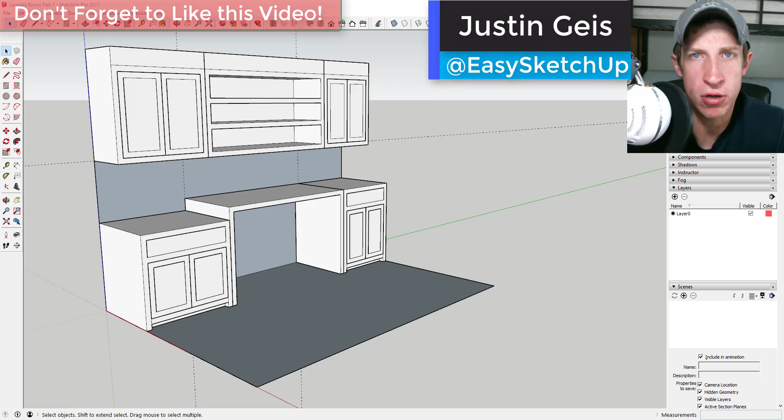So in the last video we started modeling a laundry room based on an image, and now we're going to go through and keep working on that, finishing our room out and starting to add appliances and that sort of thing.

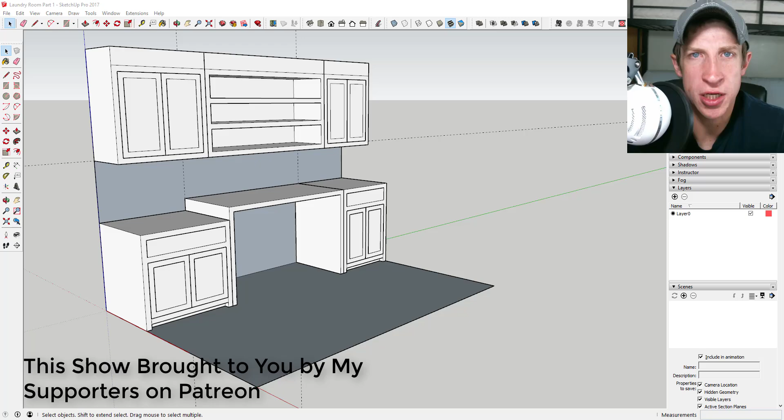Now let's go ahead and jump into it. So yesterday we focused on coming in here and working on our cabinets and our shelving and that kind of thing. Now we're going to continue that. We're going to add counters, work on this crown molding up above, and probably work on the window and some other things as well.

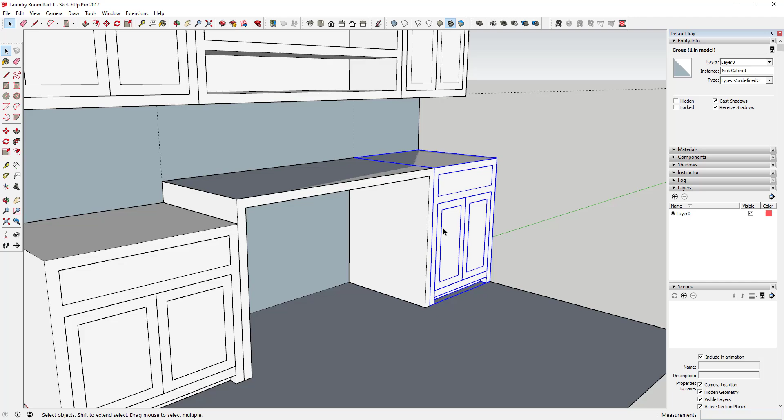The first thing I'm going to do is add my counters. To add my counters, I'm just going to draw a rectangle across the top of these objects. You can see when I click on these objects, they're in groups, so that geometry is not going to merge. Then I can come in here and pull this up, and in this case we'll give it a thickness of 1 inch.

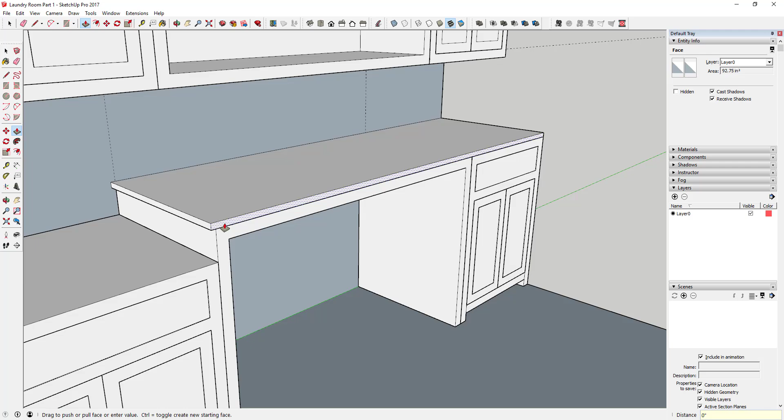It may not quite be 1 inch, or it may be a little bit more. But the other thing we're going to do is pull this just a little bit so that we've got a little bit of an overhang. We'll give it 3/4 of an inch here, and we'll double click on this front face, and that'll pull that out 3/4 of an inch as well.

Then we'll do the same thing we've done before, where we select this object and put it in a group. I'm going to go ahead and name that large counter in the outliner.

Then we're going to do the same thing over here, where we model it, and we'll have to adjust this one because that's where our sink's going to go. But for right now we're just going to model it in here and get it in a group, and we'll mess with it more a little bit later. We'll go ahead and call this small counter.

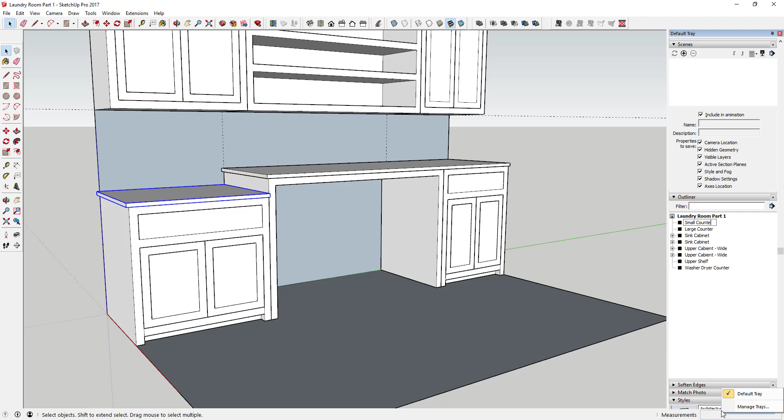What we're going to do is bring in a sink model, probably from the 3D warehouse. We may end up modeling it ourselves. We'll see, we'll do that in a little bit.

So the next thing I'm going to do is actually model out the wall over here on this side, because our image has a wall over here with a window in it, and I want to make sure we capture that window and that sort of thing.

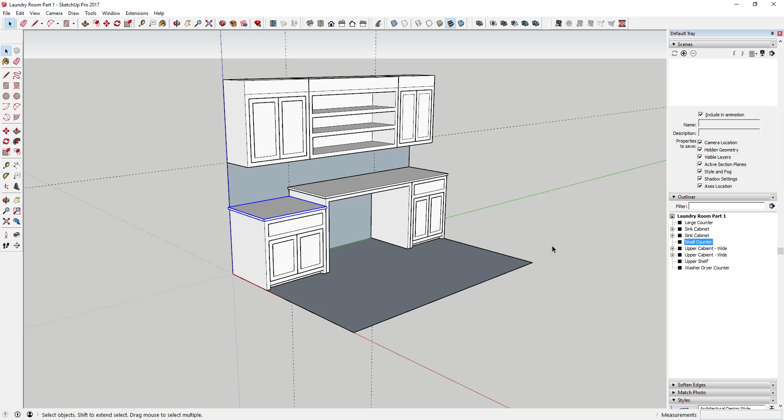So I'm going to start off and just draw a rectangle to kind of get this back wall figured out a little bit. Then we're just going to use dimensions, or the tape measure tool, to figure out where we want this to be. I'm probably figuring there's going to be about 3 feet from this corner to the window over here.

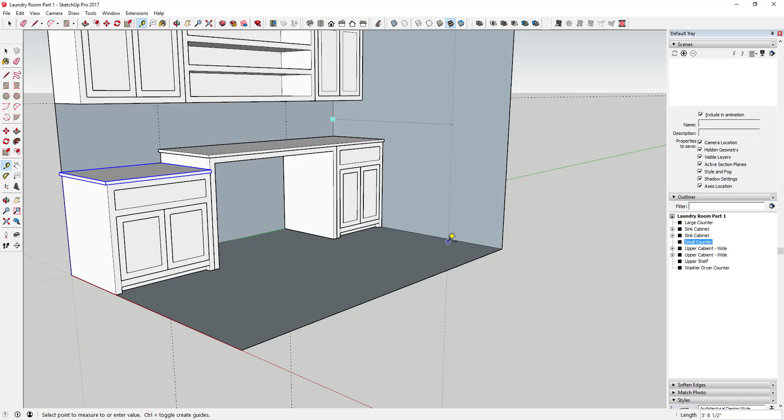So we'll go ahead and just create a guide using the tape measure tool to this point. Now I have a point where I know I want my window to start. From there, we can start using guides to rough out our window shape, and then draw in the rest of our wall.

For example, I'm going to figure it's probably about 1 foot 6 inches off the ground, and I'm going to figure it's probably a 6 foot high window, probably a nice big open window. So then from there I'm just going to draw another

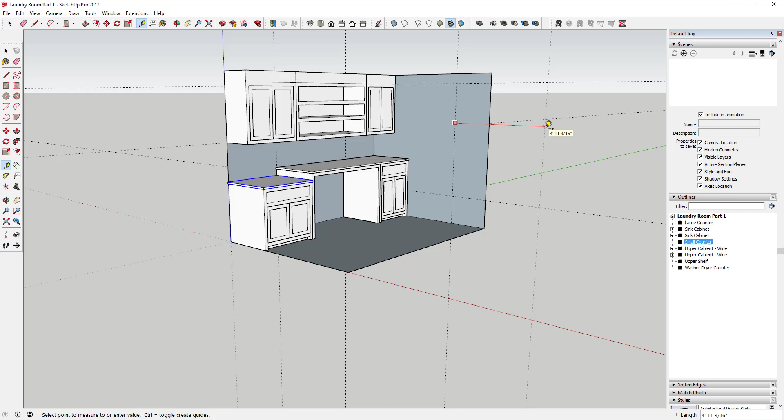dimension, or another guide using the tape measure tool, and I'm going to figure this is probably a 4 foot wide window. Based on that, I can come in here and extend this wall out a little bit, draw this wall in, and then erase this out, and this gives me roughly what my window size is going to be.

I'm actually assuming that the window is going to be a little bit smaller because it's got some trim around it, but this is basically the dimensions that I was seeing here. So we're just going to take this piece right here, and we're going to pull it in so that we have kind of our wood trim around the window.

In our image, the wood trim is pretty deep. So the other thing I'm going to do is I'm actually going to move this bottom piece down, because I'm going to assume my sill height is probably at about 1 foot 6 inches high, and then we're going to extend our trim down a little bit more.

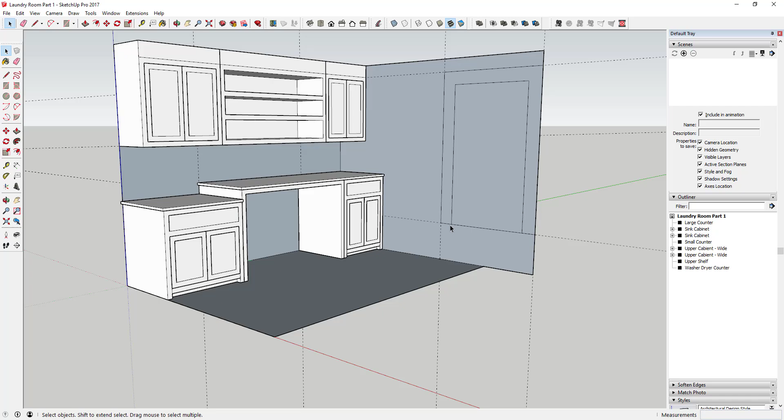So I'm just going to kind of extend this down by manually drawing it in, at least for the moment. So I've got generally my window kind of roughed out, and now I'm just going to give it a little bit of depth.

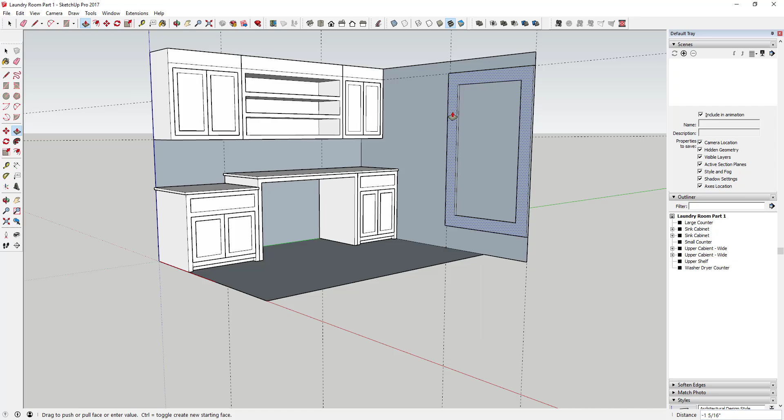So I'm going to push pull it out, in this case we'll just call it an inch for right now. I'm going to go ahead and select this whole thing, and reverse the faces so the proper side is facing out, and then we can start detailing out our window itself.

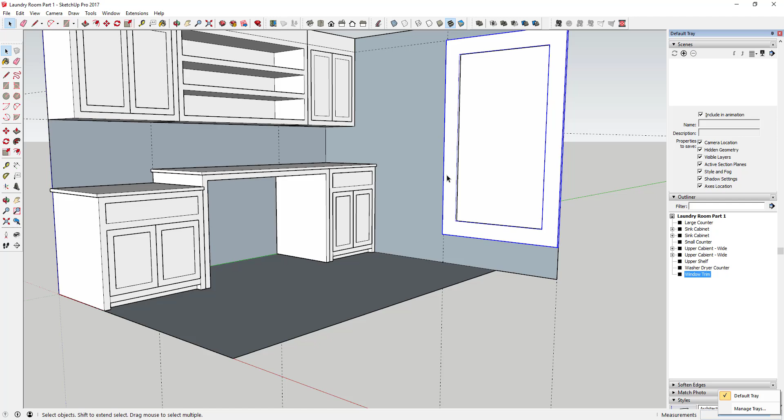The first thing I'm going to do is put all of this in a group, and then unselect the middle piece. I'm going to select basically the trim, right click on that, put it in a group, and name that window trim. The reason I'm doing that is so I can get in here and work on this face without that getting in the way.

So all we're going to do is come in here and find the midpoint along this line, finding that inference point, and then we're just going to model our glass in and that sort of thing.

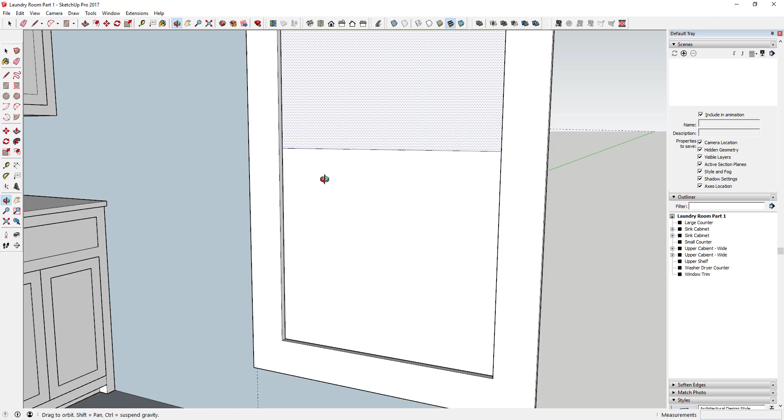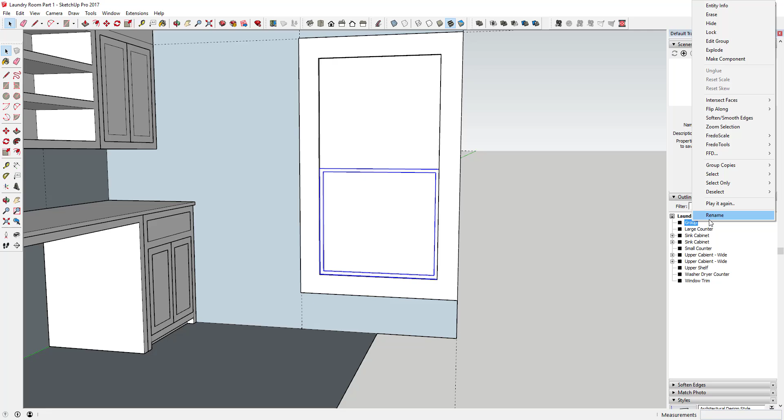It's looking like there's probably going to be about a 1 inch offset here. So we're going to offset this by about an inch, and then push pull this back a little bit, probably about an inch back, so that it looks like an actual pane of glass. We'll go ahead and select that, and make that our bottom pane. Then we'll come up here and do something similar on the top.

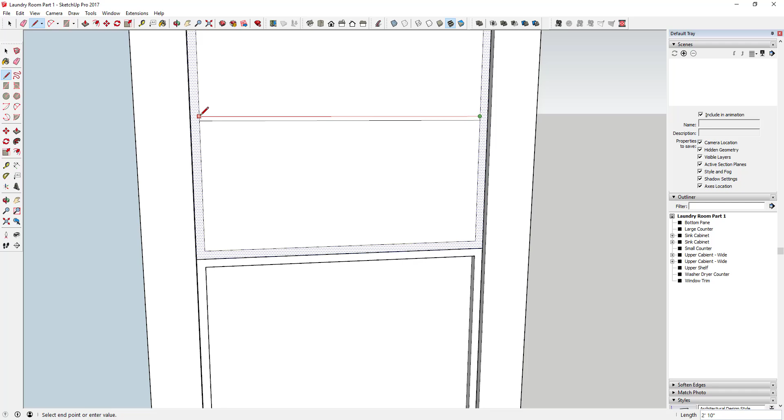Only on the top, before we do that, we're going to detail out some smaller panes in here. So we're going to figure a 1/2 inch here and a 1/2 inch here, and then we'll draw a line across.

We can erase out this middle piece. This looks like it's divided into 3 panes, so we're just going to right click on this line and click divide, and divide that into 3 segments. Once we divide that into 3 segments, we can just do the same kind of thing.

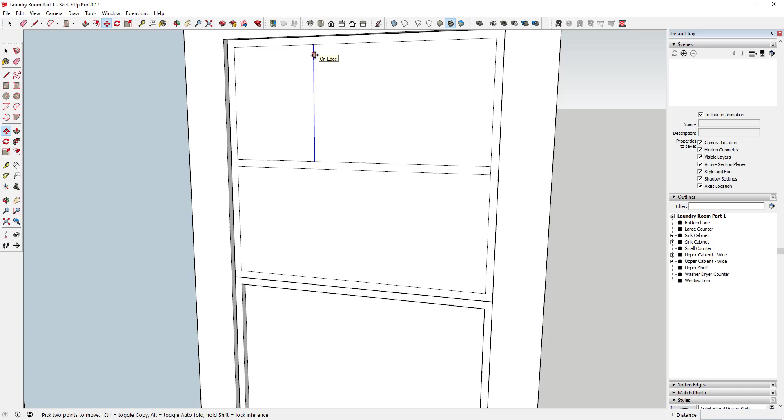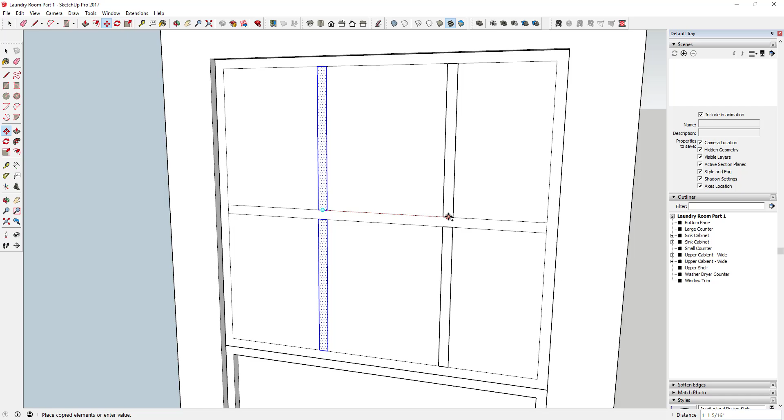I'm just going to use the move tool in copy mode to move these over really quickly and easily. Then you can double click on this to select it and use the move tool in copy mode again. Then you can double click on both of these and do a shift click, and just move them across to wherever that point was where we divided this into 3 pieces. Then you can come in here and erase out this extra stuff.

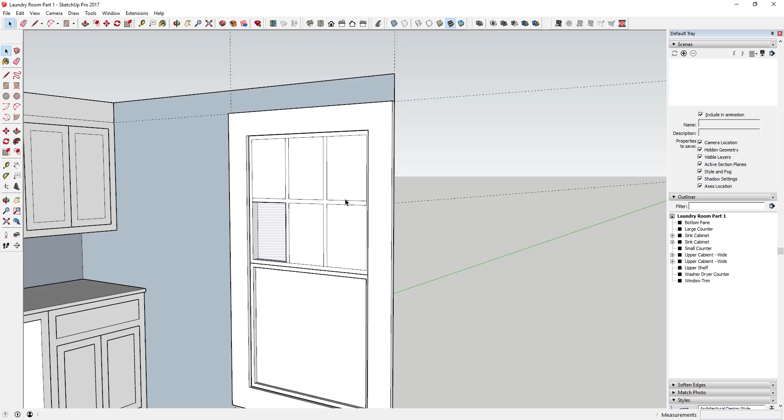And then we'll just push pull our glass back, and remember, we're going to use the memory function of the push pull tool. So I push pulled this back, and now I can activate the push pull tool and just double click on each one of these, and you can see how it's going to push pull them back all to the same depth, so all to that 1 inch.

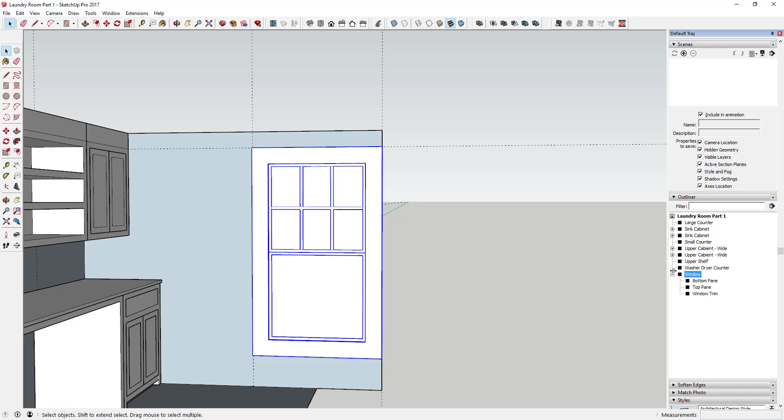So we can select this, right click on it, make that a group, and we'll call this top pane. Then I'm going to do a control click over here in my outliner. I'm going to select my bottom pane, my top pane, and my window trim, and put those in a group, and we'll just call this window. So now we can get in here and find that really easily.

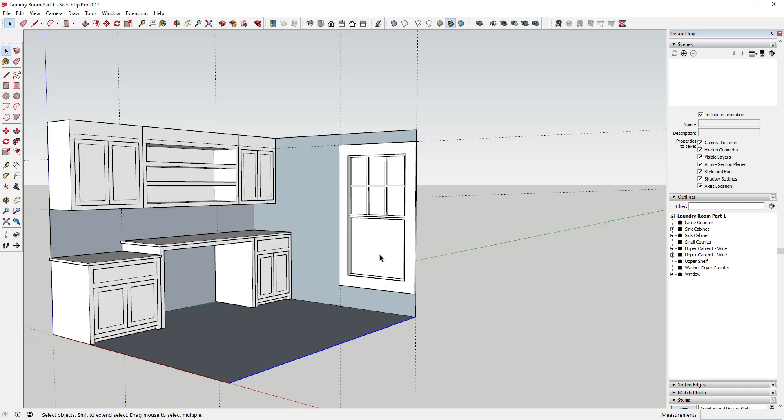And probably depending on the way that we decide to render this space, or the way that we decide to show this space, we may need to detail out more of this wall or make this floor a little bit longer. We can mess with that in a bit. So now we've got our window kind of detailed out, and we'll come back and add materials in a little bit.

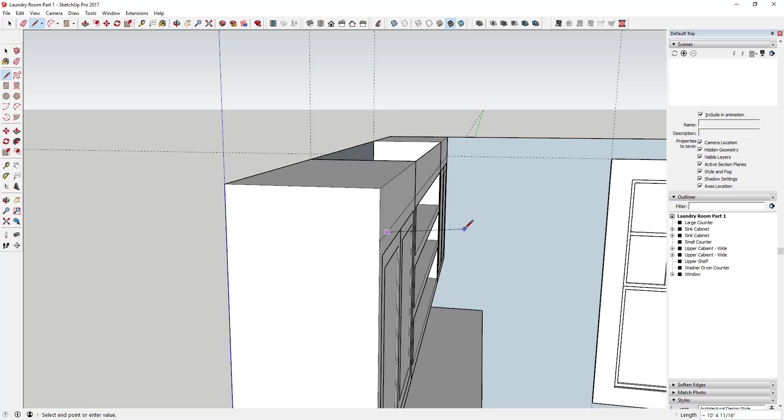What I want to do now is model out the crown molding along this face. So in order to do that, I'm going to draw the profile of the crown molding somewhere along this edge. It doesn't really matter where. So all I'm going to do is draw a little box, just kind of a face in here, and then I can come in here and model out the profile of what I want that crown molding to look like.

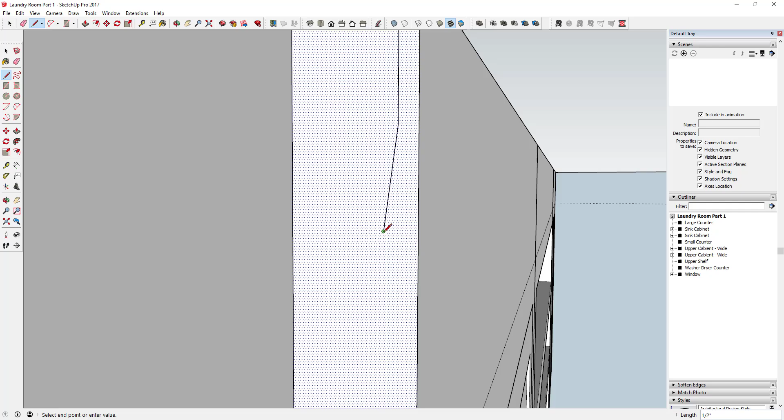In this case, I'm just going to make it very simple, and we'll see how this comes out. We may have to adjust this, but I'm just going to draw a profile along here, and then we're going to extrude it along this face. So I'm doing an initial push-pull on this to see how it looks. For now, I'm okay with the way that this looks.

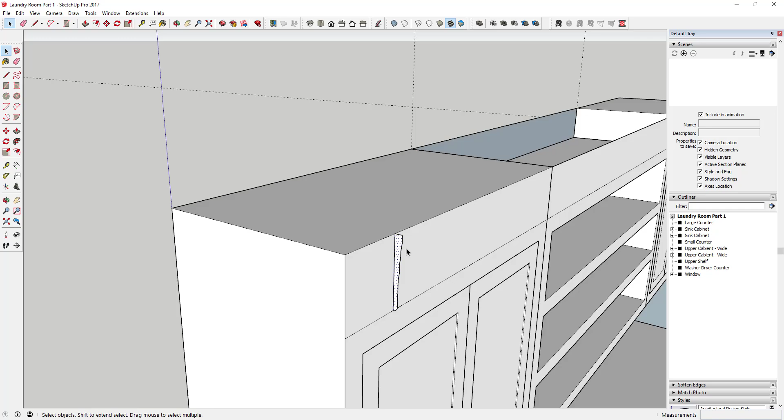So what I'm going to do is actually draw a path. I'm going to draw a line all the way along the faces that I want to extrude this crown molding along, all the way across here. And then I may have to do this twice.

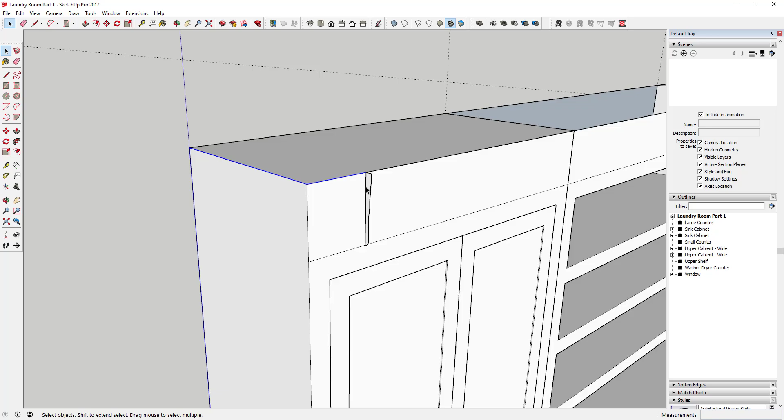For now what we'll do is select this path by doing a shift click, and we're going to activate the follow me tool. Then we're going to click on this face, and you can see how when I click on this face, it extrudes that profile along this path. Then I'm going to come in here and reverse these faces.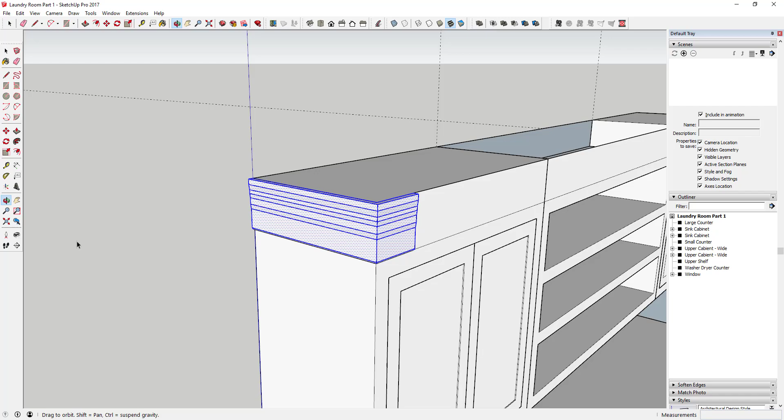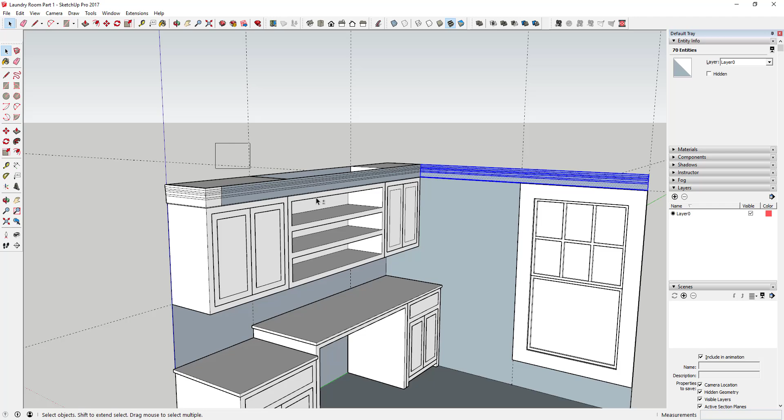But I'm going to do the same thing over here. I'm going to do a shift click and select these two lines to create my path. Then I'm just going to activate the follow me tool and click on this face, and you can see how it extruded that all the way along this path. So now I've got this big old piece of crown molding in here.

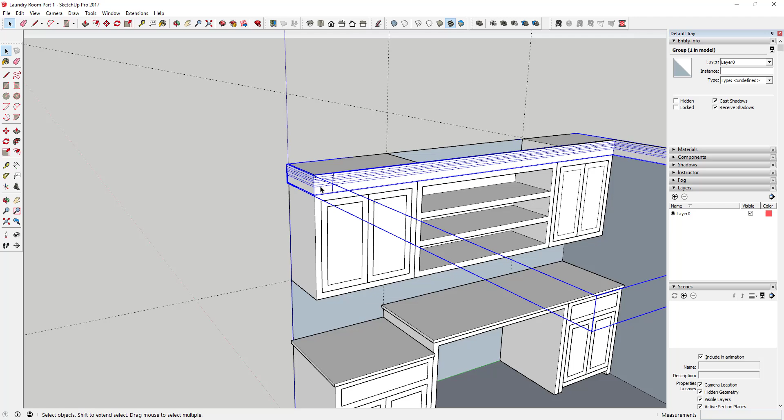So I've got my crown molding in here, and you can erase out the extra lines along here. Before I do that, I'm going to put all my crown molding in a group. I'm going to right click on that and click make group. Actually, what I'm going to do real quick, because I think I picked up a little extra geometry in here, is move this up, double click inside the group, and erase out whatever extra stuff I had in here, because I don't really want this extra geometry.

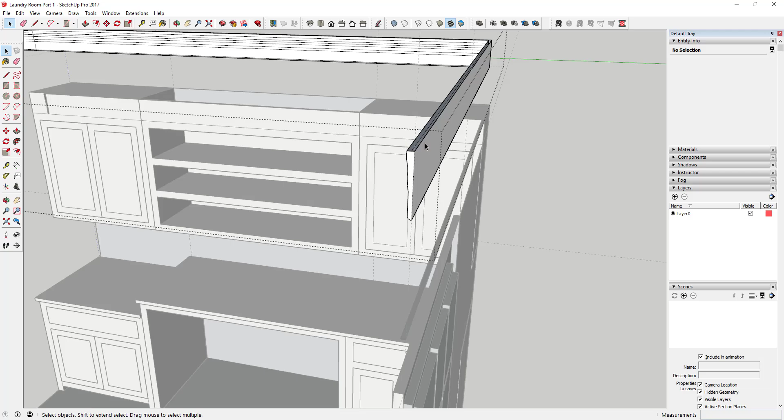And I'm also going to fill this back piece in, because it looks like for some reason that didn't get filled in when I extruded this. And I'm going to erase out this extra geometry over here. So I'm just kind of doing a cleanup, basically, so this looks like a big uninterrupted piece.

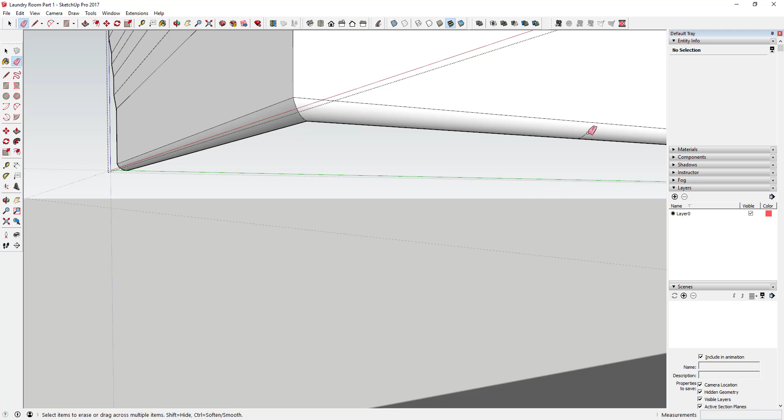And you can see how some of this got left over in here. You can kind of erase all that out as well. I like to keep my models kind of cleaned up when I'm doing stuff like this, but again, that's a personal preference thing, because it's going to be behind this crown molding piece anyway.

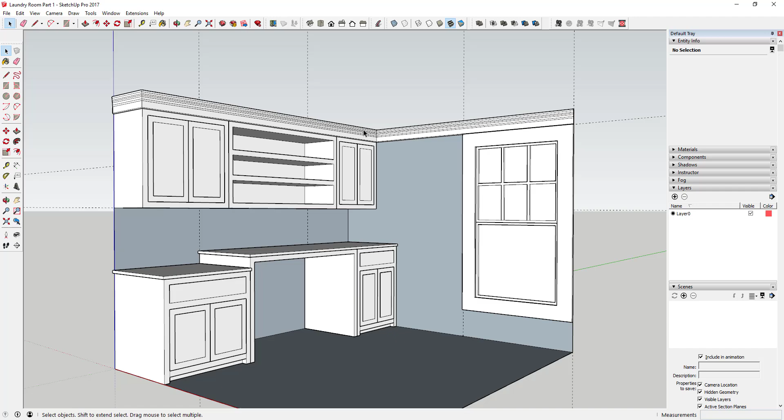So now I've got my crown molding modeled in here. So I think we may be good to come in here and start adding materials and accessories.

So the first thing I'm going to do is go up to my 3D Warehouse and see what I can find for cabinet hardware. So I'm just going to search for cabinet pull.

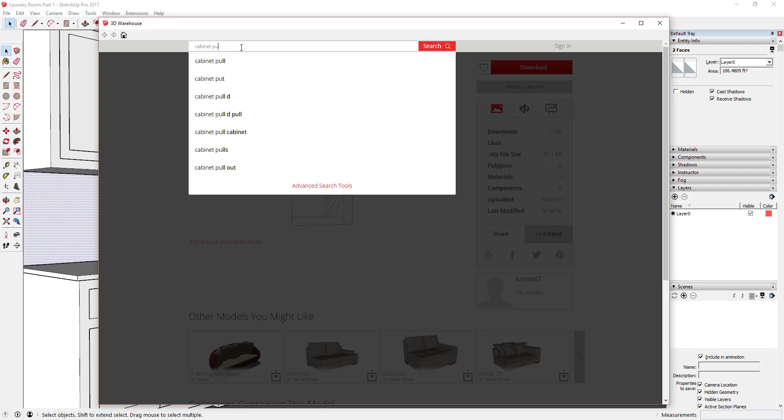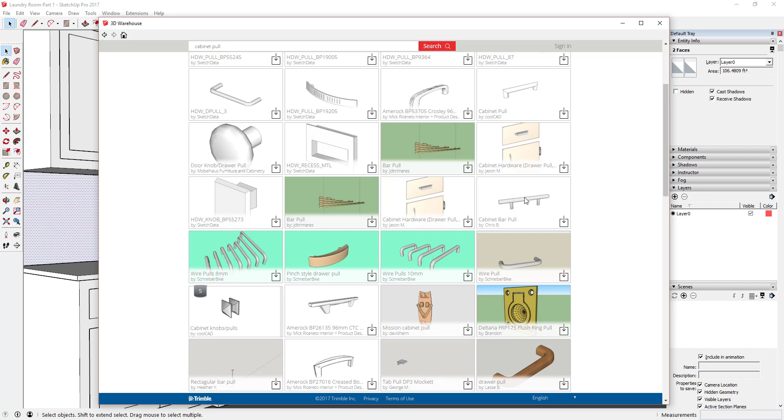You can see how there's a whole bunch of different stuff in here added by a whole bunch of different people. Some people just come in and model these because they like modeling them, and then sometimes you get these from manufacturers. They'll actually model out their own stuff so that you can find it and use it in your models.

In this case, I'm just going to find this cabinet bar pull, click download, and drop that right into my model.

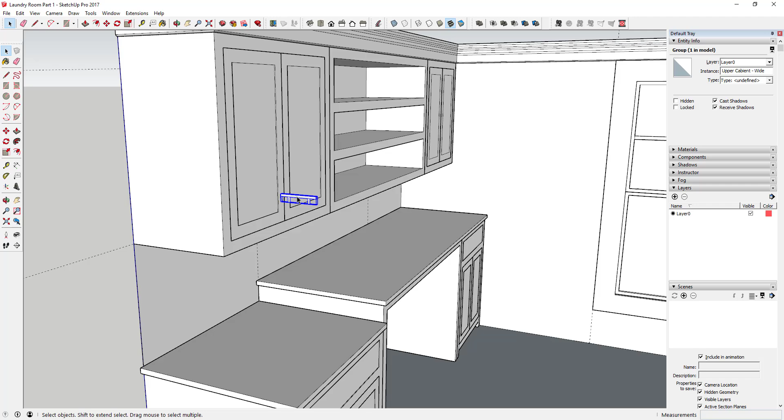What I'm going to do is start adding that into these cabinet components. I'm going to use this piece as a base, and then make copies of it, using the move tool in copy mode to create a copy. Right now that's not in this cabinet group.

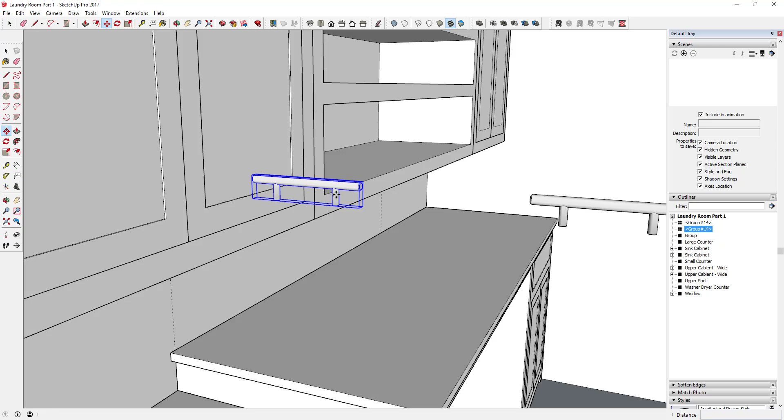What I'm going to do is go ahead and place it. I'm just going to use the move tool, and use these little red crosses to rotate this, then move it into place on my cabinet, using a little bit of inferencing to do that.

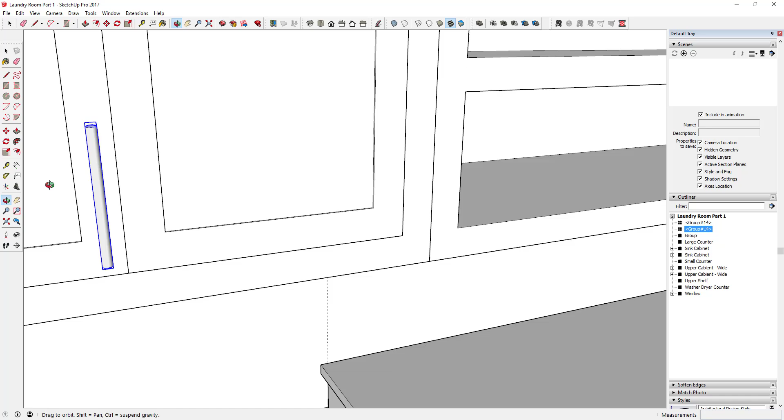And that looks pretty centered for right now. If I was really worried about it, I'd probably draw a line across to find the exact midpoint, but for what I'm doing right now, I think this is going to be close enough.

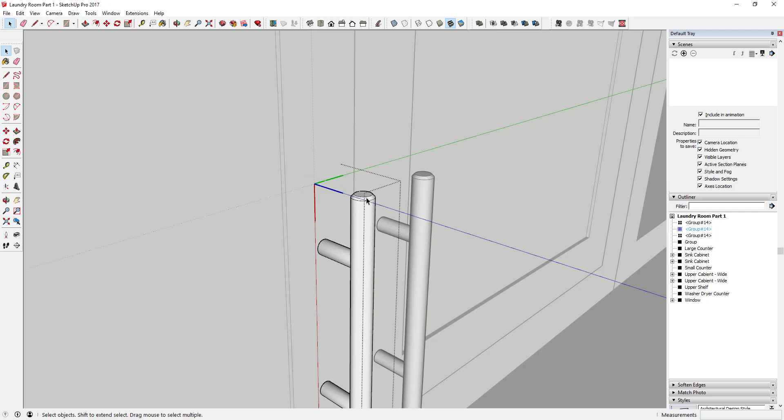You can see how as I brought those in, they're getting brought in as group 14. The reason is because they're all copies of this group 14 component, which means if I come in here and adjust one of these, the other one would adjust as well.

I think I'm okay with that for right now. We may have to come back and make them unique later. But what I'm going to do is just take those two objects and select them.

Then I'm going to find this group for this upper cabinet on the left, and drag them into that group. So now you can see how when I click on this, these are actually inside that group in that cabinet. I just use the outliner to group things appropriately.

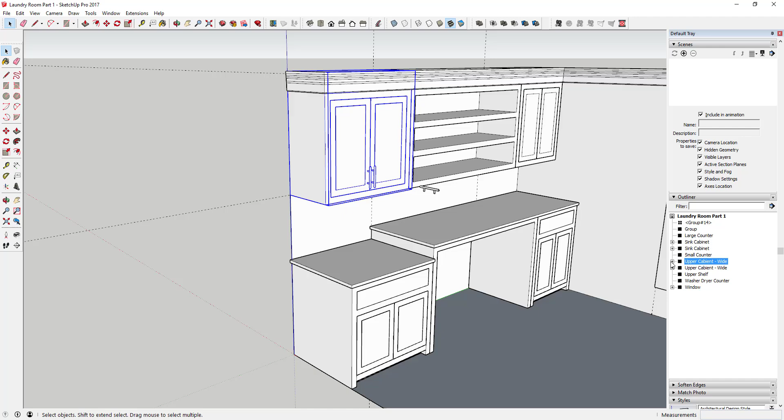If you wanted to, you could come in and rename these cabinet pulls or something like that, to keep this organized even more. It's probably not that big of a deal for right now. So I'm just going to do the same thing for the rest of these cabinets, and then I'll get back to you.

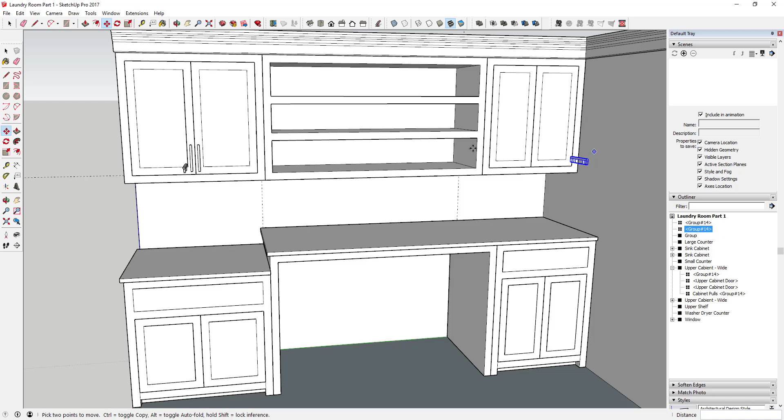Alright, so now all that hardware is in a group, so I can come in here and delete out this extra piece. Now I've got hardware in all my cabinets, and they're inside the groups and everything else. Now we can start looking for washers, dryers, and hardware and that sort of thing.

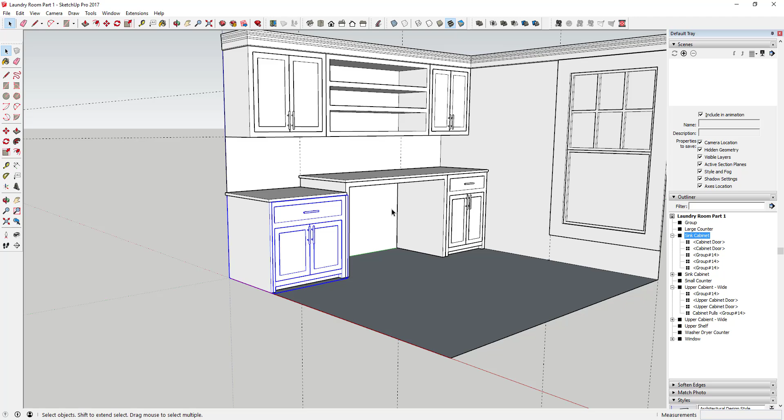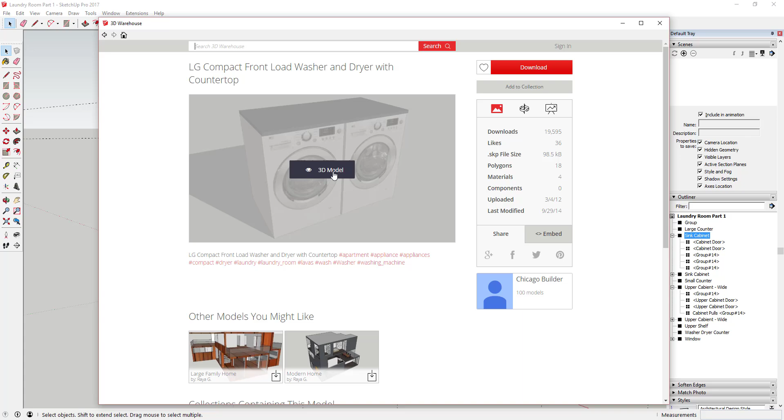Depending on the way that you want this to look, when you're picking out a washer-dryer model, you can see how this washer-dryer is actually just an image placed on a flat face. You can bring that in if you want to, or you can go find a washer-dryer combination that has more of the geometry actually modeled. You can also look for something that's the color you want, or come back in and adjust the color later.

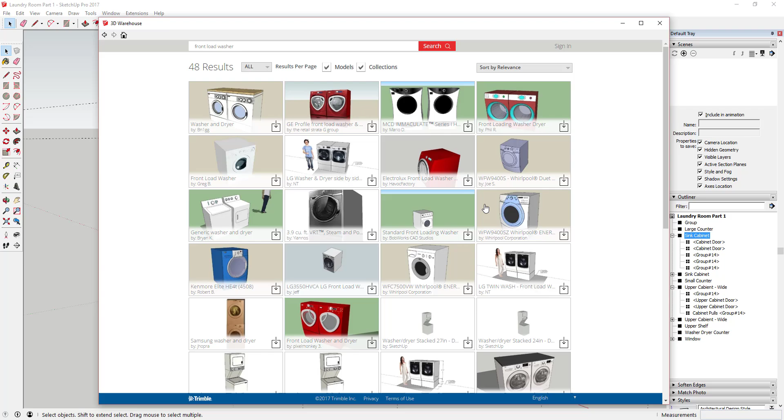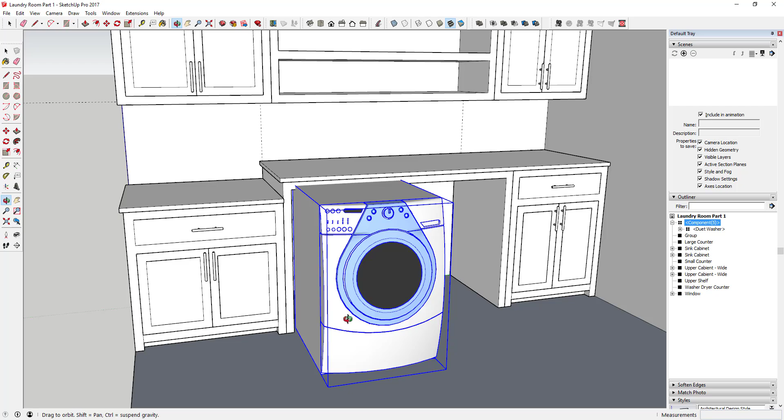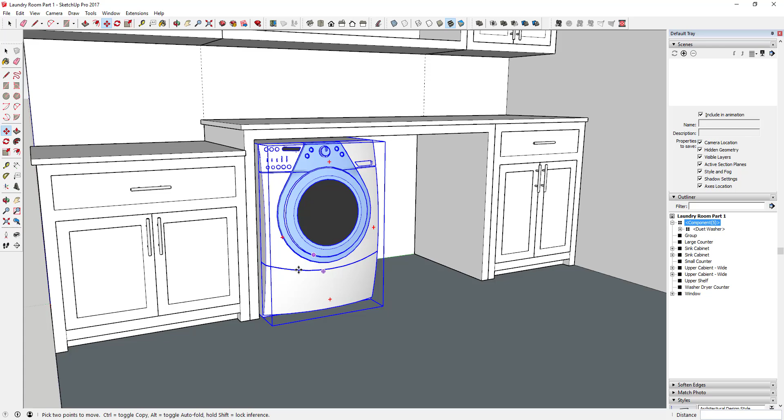So I'm going to bring this in, and as you can see, that comes in backwards. All you have to do is flip that using the scale tool. One useful thing here is scale - this probably means my counter is a little bit too short for this particular model. So I'm going to scale it down a little bit and move it back into place. You could also use these models, especially if they come from the manufacturer, to figure out if things are actually going to fit or not.

These are pretty similar looking, so I'm just going to make a copy of that one for right now. We're going to come back in probably in the next video and color these up so that they look a little bit more realistic.

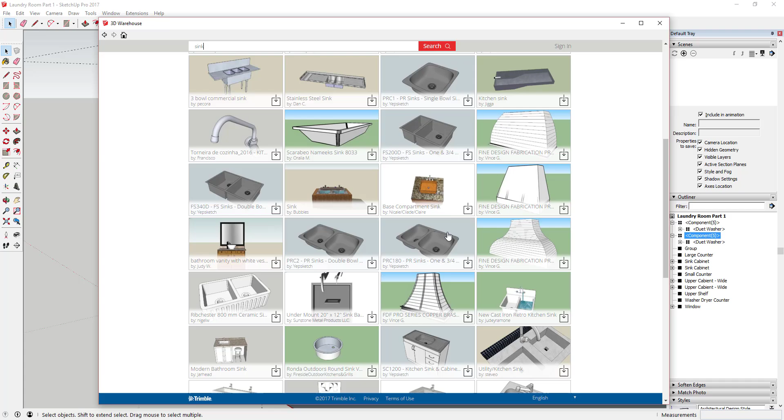Usually you can come in here and just do a search for a sink and kind of find the sink that you want. So you could look for single sink, or you could probably look for something like single kitchen sink as well.

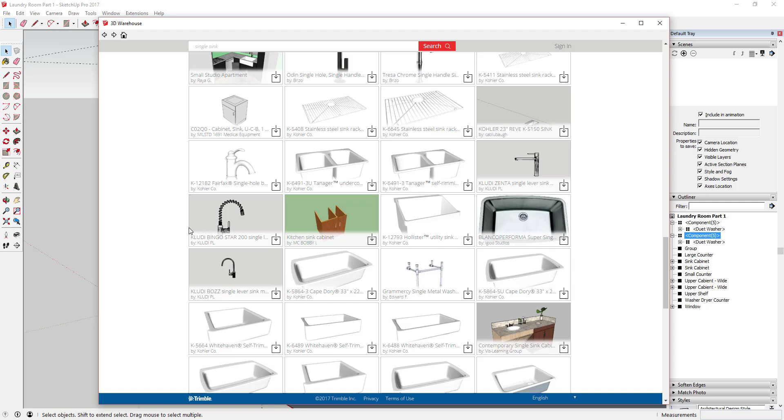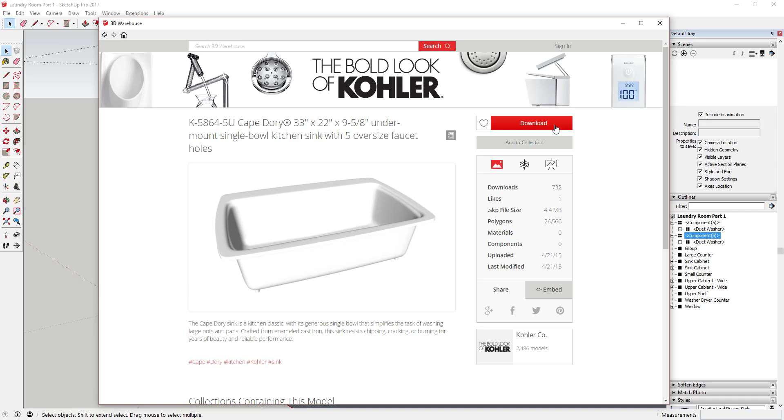You can see how there's a lot of these basin sinks modeled by Kohler, the actual manufacturer. You can bring these in and see how these are actually sized. The only thing I don't like about these is they're very rounded and they have a lot of polygons. We're going to go ahead and bring this one in and kind of see how it looks. But you do have to be careful about the size of the models that you bring in from the 3D Warehouse, because it can really slow your model down.

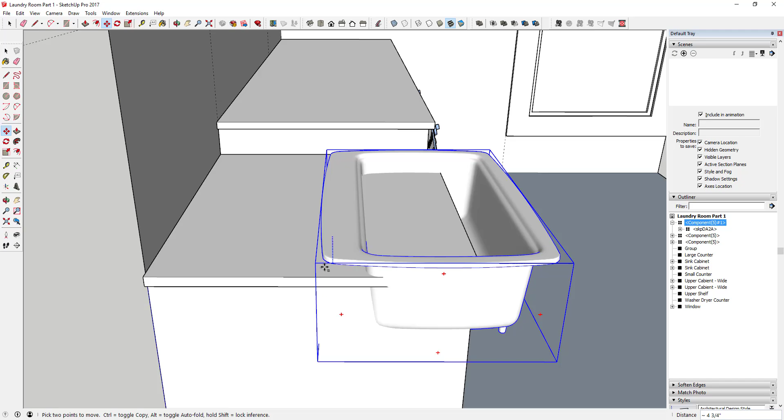In this case, all I'm going to do is set this sink on this counter, and a lot of the time you can find an inference point on here to use. I'm just going to move this back in here, and we'll come back in and add kind of a stainless color to this later.

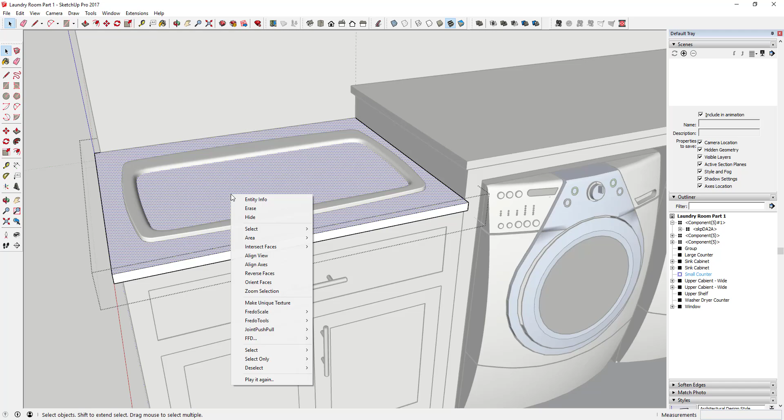The other thing you can do is double click inside this counter piece, right click, and click intersect faces with model. You can see what that should do - it didn't do it exactly right, but it should come in here and intersect this face so that you can delete it out.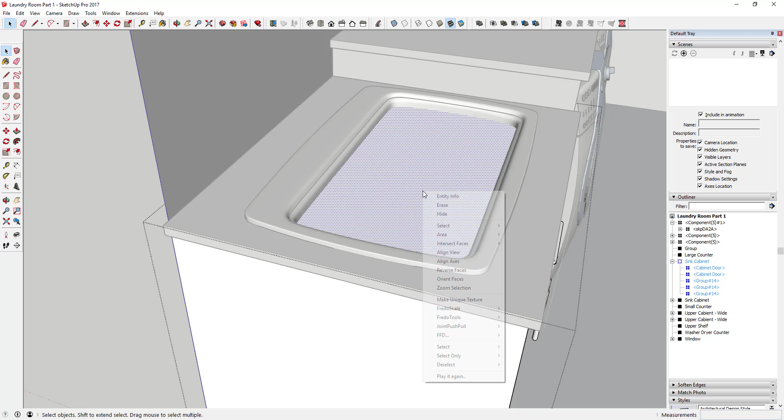That's so you can actually see the bottom of your sink. You can see how when I do an intersect faces with model, it takes the faces of where those intersect and makes this its own face. So I was able to delete those out so that I actually have my sink in here.

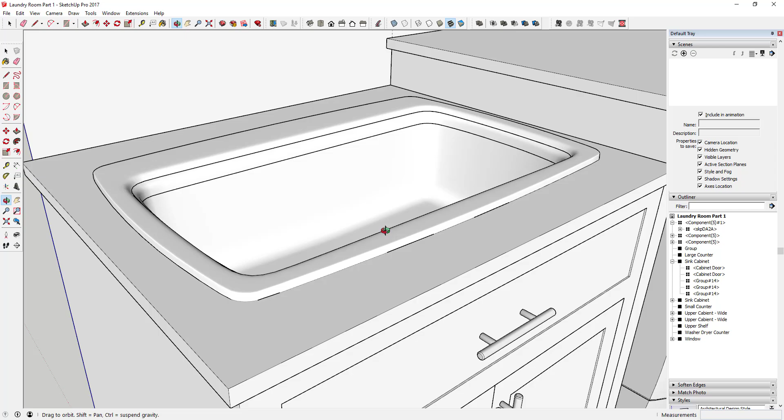Then finally I'm just going to bring a kitchen faucet in. You can see how there's a lot of these modeled out, again, by the manufacturers. This one's actually modeled with pretty good modeling practices - it's kind of small with all the curves that are in here. So I'm just going to bring this one in for right now.

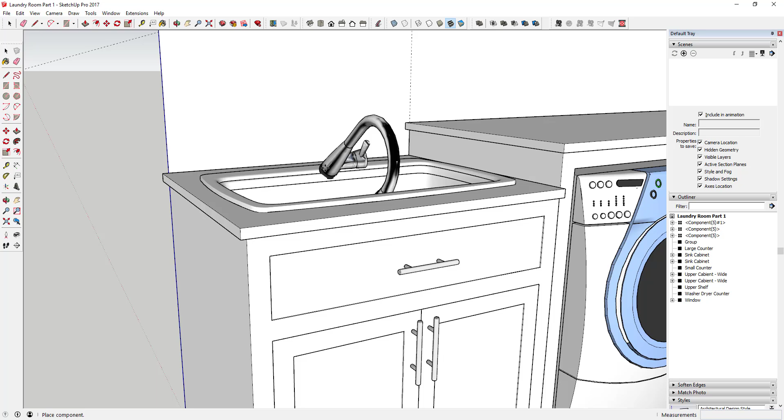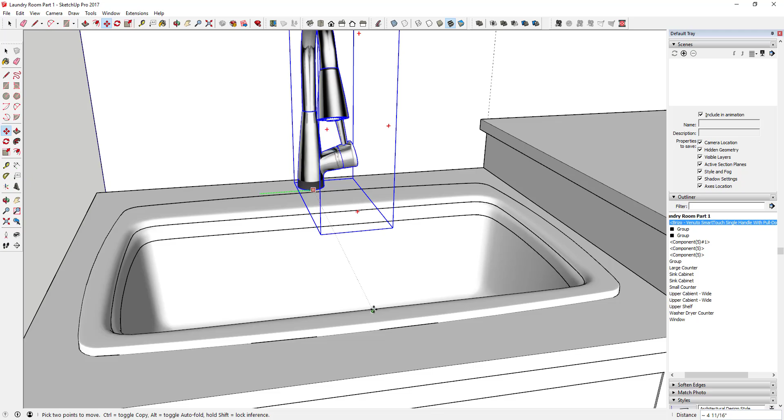You can definitely pick one that you like. You can see how that comes in here kind of sideways, so I'm just going to use the rotate tool. Actually, you don't even need to use the rotate tool - you can just use the move tool, and it's got these little crosses that you can use in order to place this model. Then I can just inference this to find a midpoint, and go ahead and set this in place.

So now I've got all my crown molding modeled in here, I've started bringing in these models from the 3D Warehouse, and I've drawn my window. In the next video, we're going to talk a little bit about materials and kind of where to go from here.

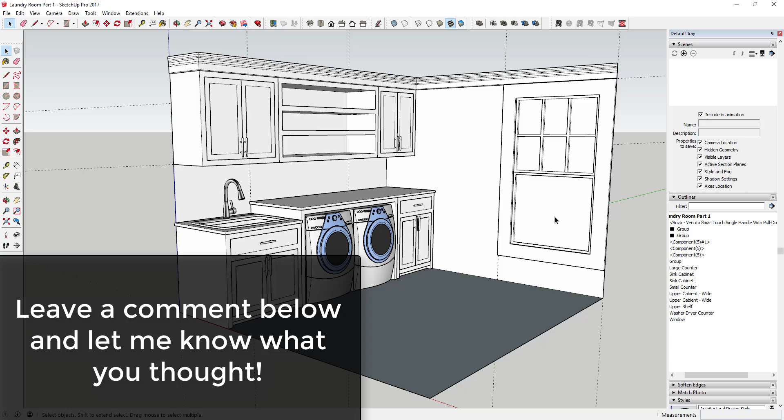Leave a comment below and let me know what you thought - again, is this helpful to you? Kind of going step by step like this? Is it a little too basic for you? I just love having that SketchUp conversation with you guys.